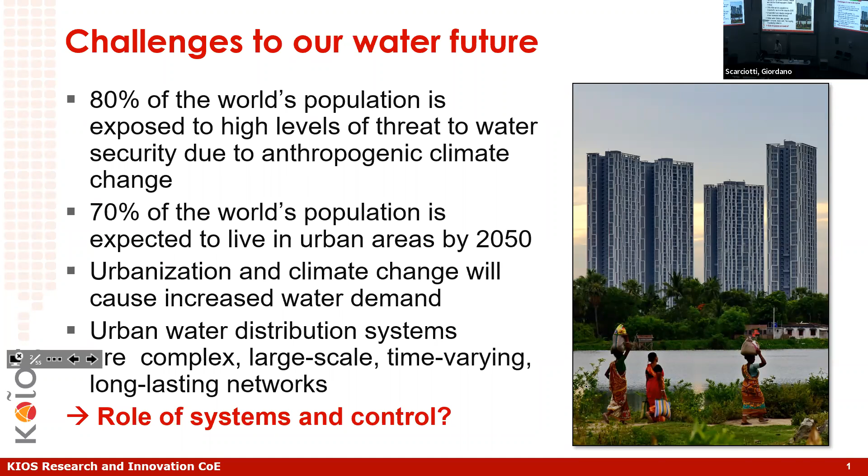Now, what can we do as systems and controls people? Where can we contribute? Of course, we cannot solve the climate change problem, but we can contribute in some key challenges of water distribution systems. I'm listing here four of these, which I think are very important, and I think we can contribute significantly in these areas.

One is that 25% of the water actually being produced in Europe is lost because of leakages, theft, and things like that. So this is something we can do better, and I'll talk more about it.

The other thing is about the quality of water. There are new directives coming out, new studies that indicate the quality of water is not at the required level, and we need to do more about it. Again, this is an area where systems and controls people can contribute.

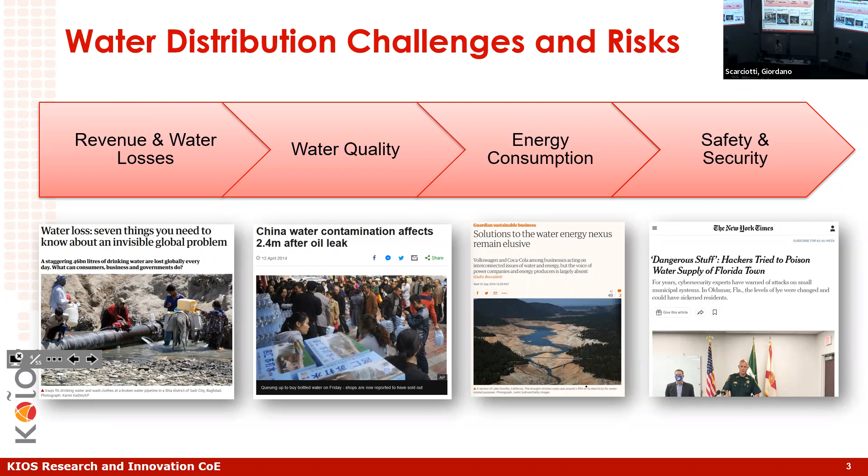And finally, with the new sensors and new instrumentation going on, the safety and security of water systems is becoming very important. So let's go through these four areas and talk a little bit about the challenges.

This shows the issue with water loss. 25% of the water in Europe is lost. In some cities worldwide, this is a lot larger. I'm showing some of the cities with the largest percentage of non-revenue water. So what is the cause of this? There's aging infrastructure, pipe breaks, background leakages, tank overflows, water theft, and metering errors.

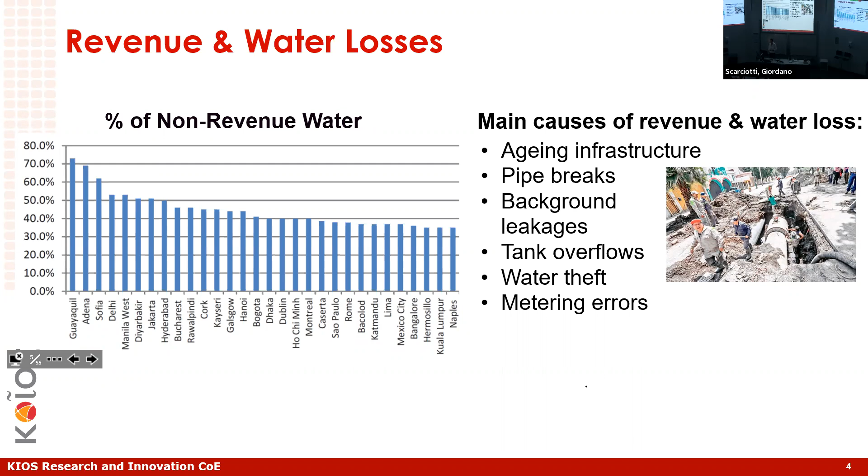So overall, just to get an image, drinking water losses every day are equivalent to 46,000 Olympic pools. This is a lot of water lost every day, and this is water that has already been cleaned and is lost.

So you may think, what can we do? If a pipe breaks, the water is lost. However, a lot of the losses are not like that, because the big losses are easy to detect and take care of quickly. A lot of the ones that accumulate to be very big are small losses that are never detected, so a small amount of water is lost for a very long time, and that's a big part of the problem.

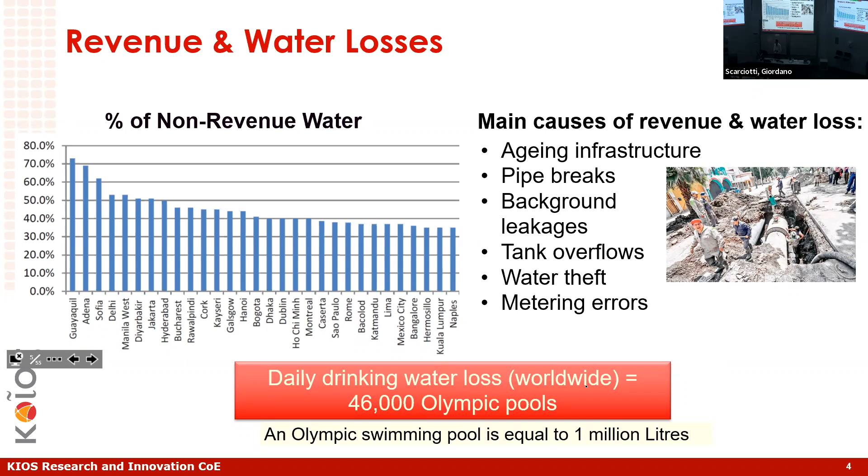When it comes to water quality, the raw water is usually dirty, is cleaned, disinfected, and then sent to consumers. The way water is disinfected is usually with chlorination. This is not always the case, some countries use other techniques, but most countries use chlorination.

Now, with chlorination, there's the issue of how much chlorine do you put. If you put enough chlorine to kill all the bacteria, you may get problems with taste, with smell, with complaints. But this is not the biggest problem. The biggest problem is that some studies show these chlorination byproducts are actually carcinogenic. So you want to put enough chlorine to kill the pathogens in the water.

And of course, the way that the disinfectant decays over time, at the same time, you don't want to put too much.

So there's definitely a control problem to be solved there. In addition to that, you have contamination events due to managing accidental or other contamination events, as well as malicious attacks that might contaminate the water.

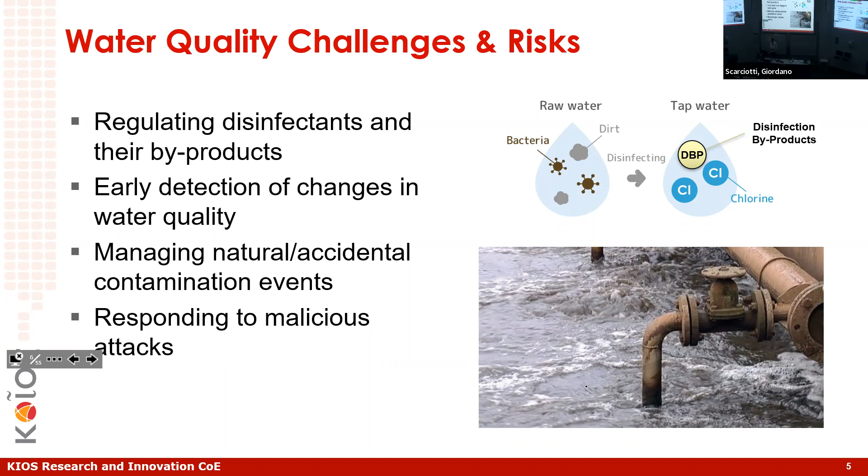Water quality is another key issue, and one example that indicates an accidental contamination crisis happened in Nokia, a city in Finland, where there was a 2-day delay to detect a contamination that caused 10,000 people to be affected and 3 months of water ban. If there was some algorithm that could detect this immediately, in 5 minutes or 1 hour, that would have solved these problems.

The other issue is with regards to energy consumption. As I mentioned, 4% of EU electricity is used by the water industry, this is for moving water, for pumping. This is also in the US, and of course this can result in significant greenhouse gas emissions. Just for moving water in the UK, and the UK doesn't have a lot of mountains, still 4 million tons of CO2 equivalent are used just for moving water, and in the US that's actually 10 times more. So there is potential for significant savings if we can do something about that.

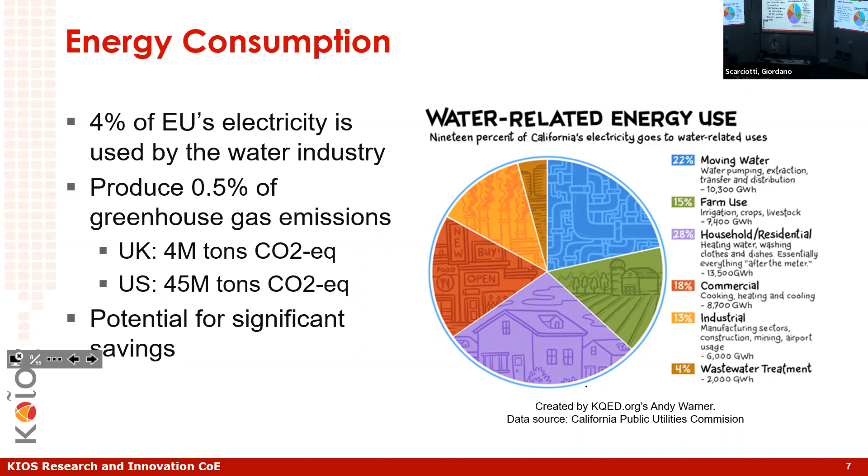And finally, safety and security. This is something that water utilities didn't have to worry about before. Nobody cared about it because everything was manual. Now, with more automation, there is more potential for malicious attack.

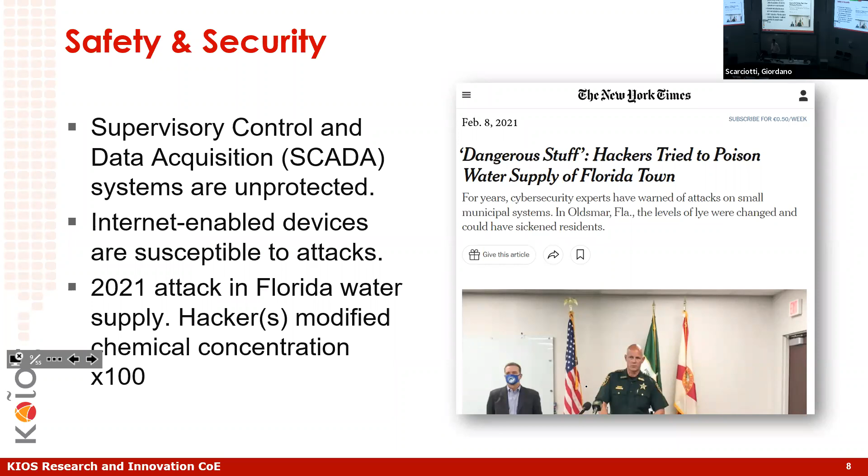And this was illustrated last year when there was an attack by a hacker in Florida, which modified the chemical concentration of a certain chemical by 100 times. Luckily, nothing happened because one of the operators noticed something, but if it wasn't noticed manually, it would have created a significant problem.

So the trend nowadays is towards having more instrumentation. I personally started working in water systems in 1995, more than 25 years ago. At that time, I had a master's student who wanted to work on an environmental issue, and we found a group in the environmental engineering department we could contribute to. But at that time there was not much sensing going on, everything was open loop. So most of the work we did at that time was just in modeling and trying to understand how systems people can contribute.

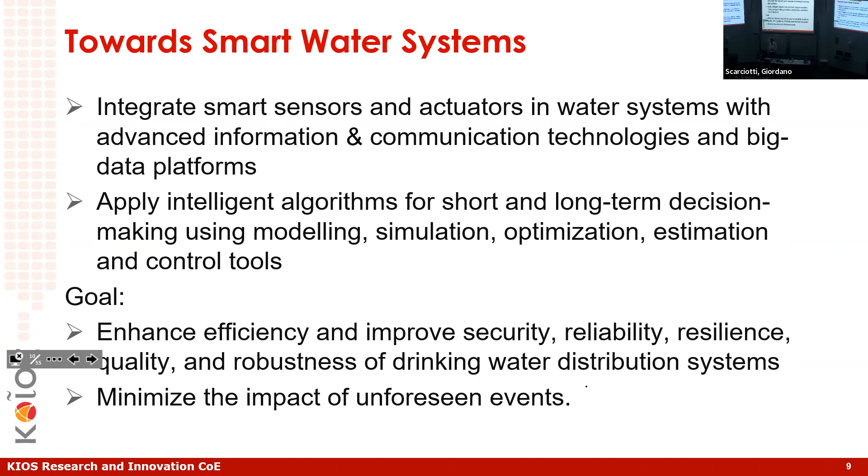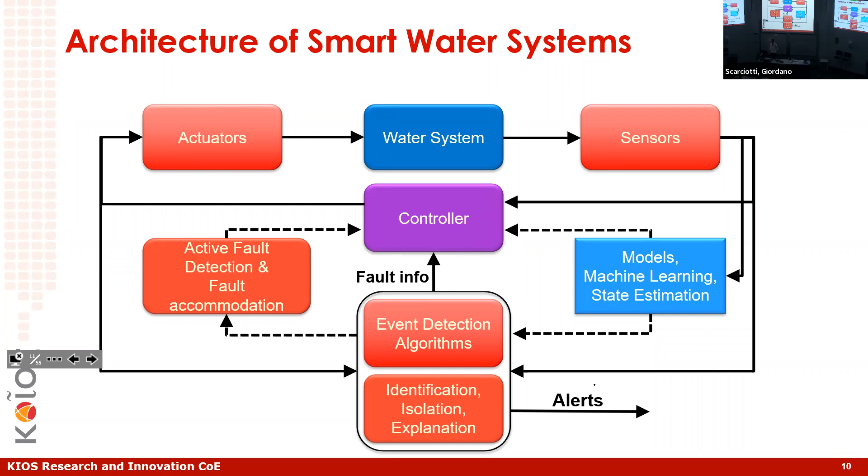So when we talk about a water system, what are we talking about? There are two types of dynamics that are very important: the hydraulic dynamics and the water quality dynamics. There are others that can be considered, but most of the work out there is in these two areas. The hydraulic states estimate water flows and pressures, while the water quality dynamics usually involve some chemical concentration. Usually civil engineers deal mostly with hydraulic dynamics, and environmental engineers and some chemical engineers deal mostly with water quality dynamics.

Usually computer engineers and electrical engineers don't have a key role, and this is where we come in nowadays with new technologies being developed to do things like real-time control and optimization. If we could estimate the states, then we can use techniques to detect pipe breaks, equipment failure, water contamination, cyber attacks, and so on. Unfortunately, real-time estimation in the current setting is not something used in practice, and let me explain why, what the current practice is, and where things are going and where we could contribute.

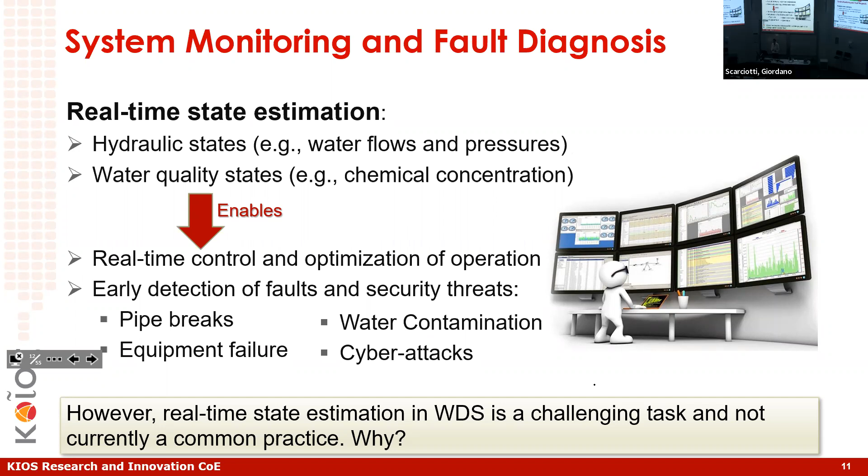So in terms of hydraulics, what we have is similar to energy and power systems: we have a transmission network and a distribution network. The transmission network is usually the big pipes, and the distribution network is in the cities.

Usually, water comes from reservoirs or other sources, is cleaned and pumped to where it wants to go. The hydraulic states are described by pressures at nodes, tank levels, flows in the links, and so on.

An important uncertain thing that creates a lot of the research motivation for some of the things coming later is that water demands are actually an uncontrolled input. We have water demands that we don't know. We have some aggregate estimates, but we cannot use that to estimate what are the flows in the different links and so on.

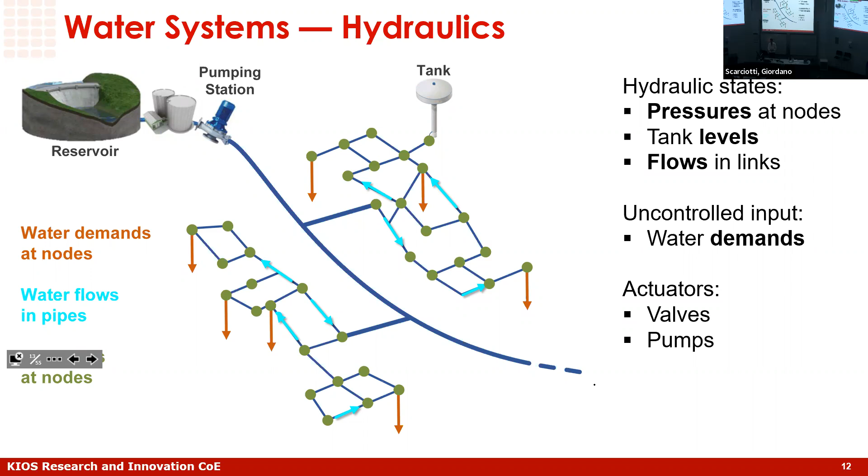Now, the actuators in terms of hydraulics are usually valves and pumps, but they are not advanced control algorithms, and a lot of them are actually open loop, manually operated. The distribution network is usually separated into what's called district metered areas, and in current practice, a lot of times all they have is some pressure and flow meter entering a district, a DMA. That's what it's called, and that's all there is.

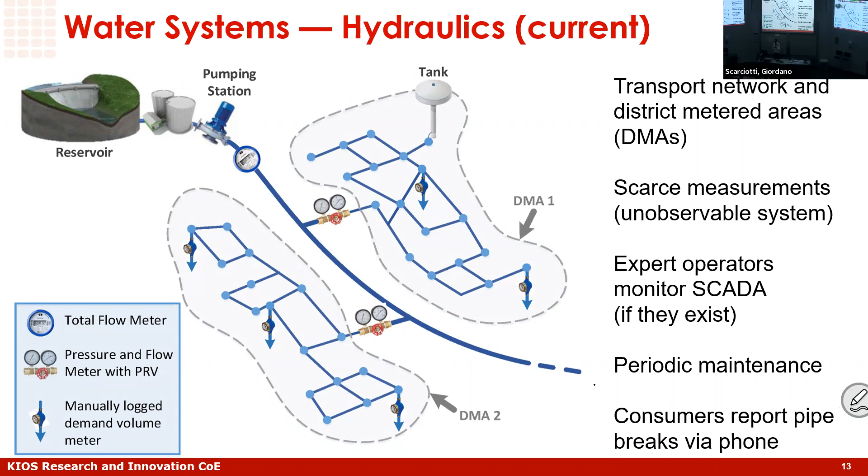You can think that it's very hard to do control with just one sensor in a network that has so many nodes. Now what is envisioned, and where the technology is heading, is to have remote sensing, a lot more real-time state estimation using measurements, remote actuation for real-time pressure and flow control, and that's why people from our community can contribute in these areas.

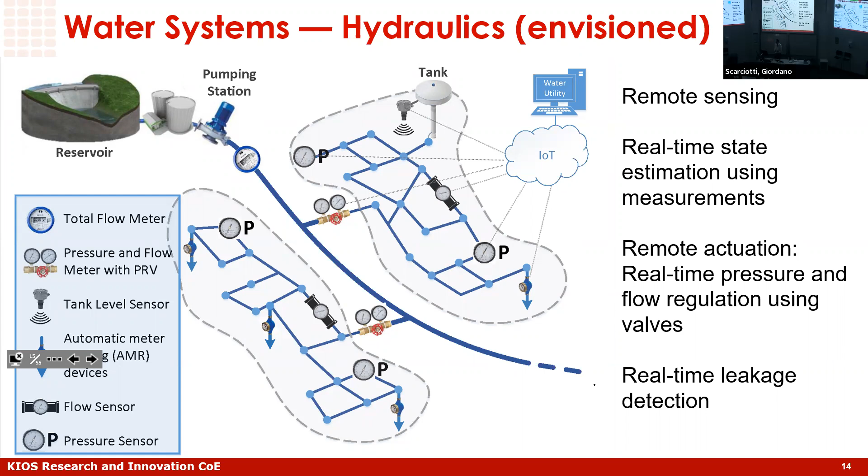In water quality, it's actually even worse because there's hardly any sensors. The water disinfectant, usually chlorine, is injected only at one location after the water is cleaned, in an open loop fashion. They just have a schedule, and then somebody goes to different parts of the network, maybe once a day or once every 3 days, gets a sample of water, takes it to the lab. It usually takes 24 hours to analyze what is in the water.

This is all just to make sure - if a contamination were to happen, that would be a disaster because it wouldn't be caught early on. So what is envisioned here, and already there's a lot of sensing being developed, is multi-parameter sensors placed for quality monitoring and contaminant detection.

Disinfection booster stations for improved regulation - so instead of having one control input, to have several booster stations at different locations based on real feedback information in order to do that. So this is what is envisioned, but is not in practice yet for many reasons.

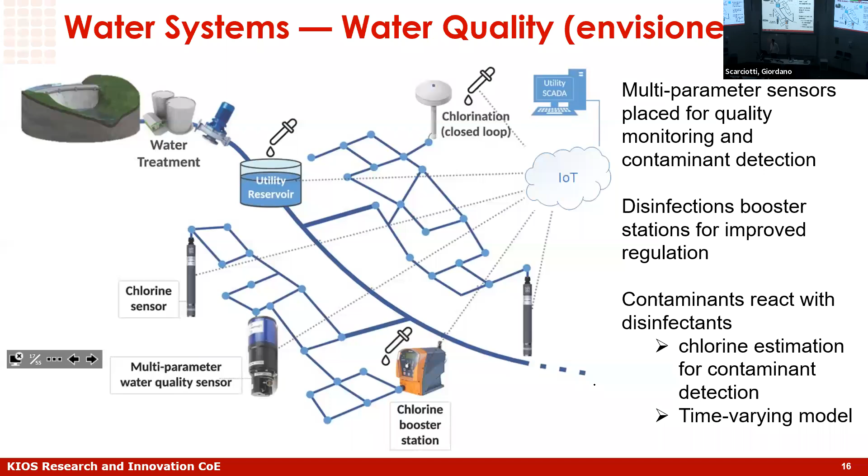But this is actually starting to happen. So in summary, if we were to look at this from a controls viewpoint, what we have is two types of dynamics: the hydraulic dynamics and the water quality dynamics. The hydraulic dynamics, because of the flows, affect the water quality dynamics.

The disinfectant chlorination - if the water is not moving, there's a decay in the disinfectant over time, so it's not as effective. If the water is moving fast, the disinfectant moves with the water. So the hydraulic dynamics affect the water quality dynamics, but not vice versa. This is the general setting.

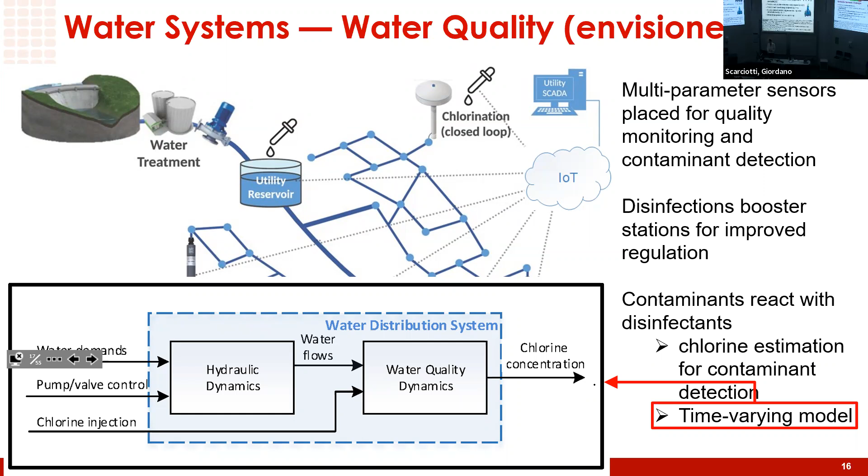In the last few years, there's been work in these areas. I just wanted to mention some of the things that have been done, especially from other people in this area, and also from our community. In hydraulics, there's been work on sensor placement, demand estimation, state estimation, leakage diagnosis, demand management.

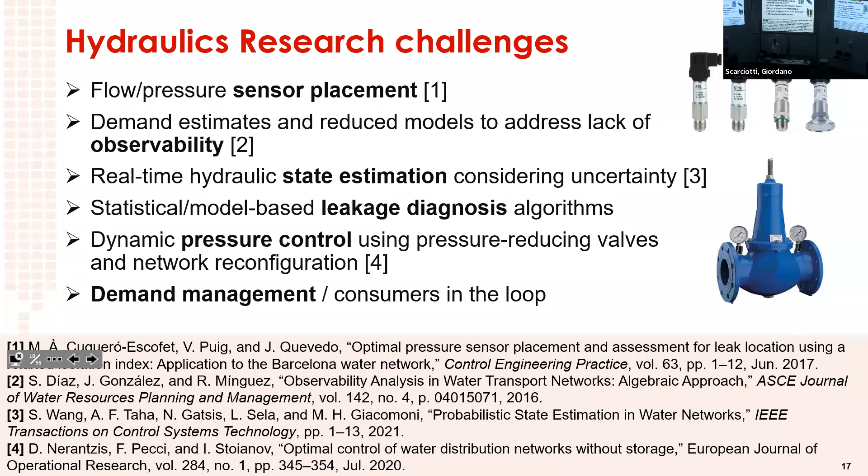In the area of water quality, there's again the question of where do you place these sensors. This is an important area because you may have 1,000 or 10,000 nodes, and you may have like 5 or 10 sensors to install. It's not just the cost of the sensors. Unlike other applications where 90% of something is the cost of buying the sensor, in water systems, even when you buy the sensor, installing it usually requires significant cost, and maintaining it over time also requires significant cost. So this is an important thing.

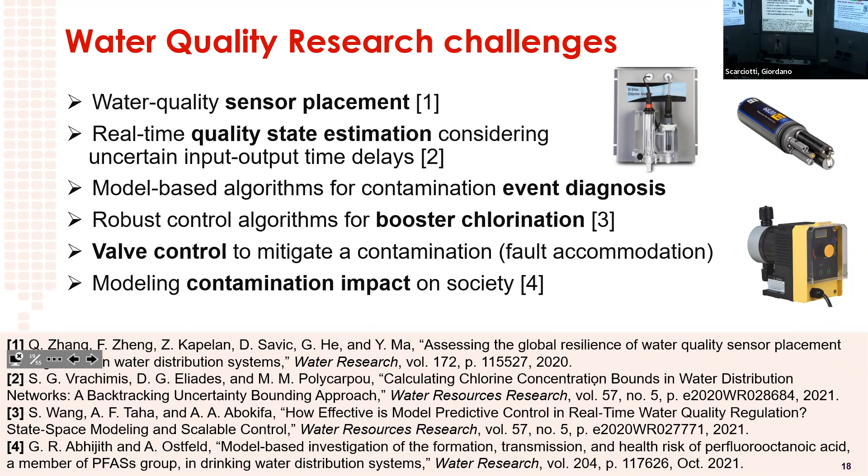Some other areas people have worked on are booster chlorination, valve control to mitigate contamination, which can be thought of as a kind of fault accommodation problem, and also modeling of contamination impact on society. So these are some of the areas that people have worked in. This water-energy nexus is something that I know in the EU is becoming an important research area.

One of the reasons, as I said there are several, is that a big percentage of the electricity, of the energy in general, is used for water movement. So there's an incentive to optimize water pump control under uncertainty, to optimize water pump selection for load shedding to reduce the risk of power system instability and water shortage, and also to detect anomalies in pump energy consumption in real time.

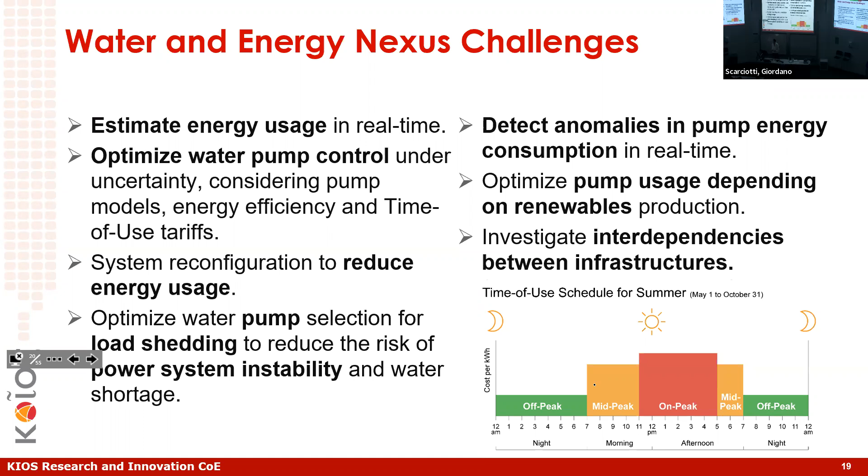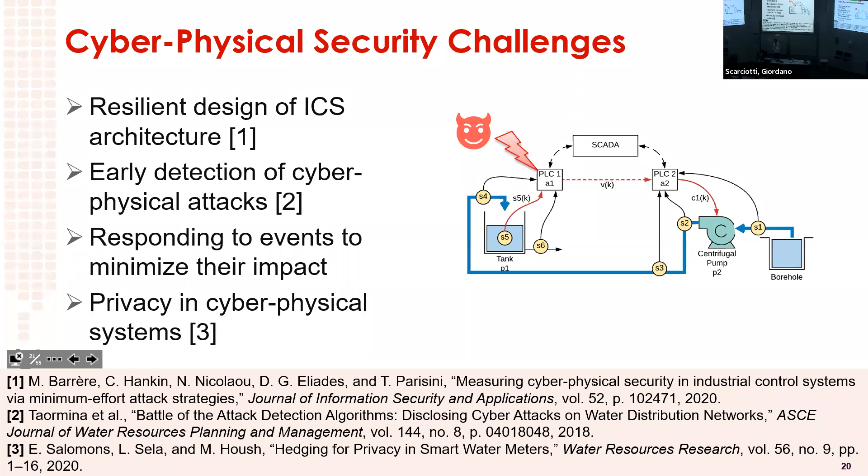This is another area that people have worked on, and also finally in the area of cyber physical security, how to detect cyber physical attacks in the case of water systems as quickly as possible.

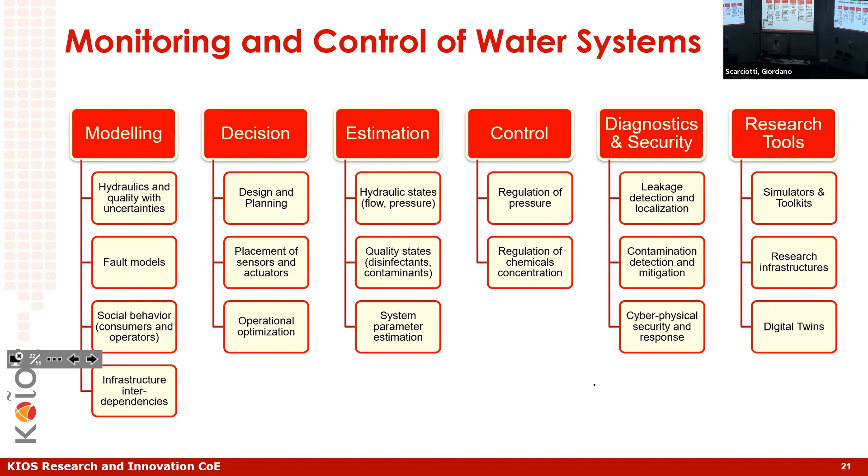So in the rest of my presentation, I'm going to talk about different aspects related to systems and controls, with some results. I'm not going to be able to cover a lot of things, but you'll get an idea of some of the things going on and where the systems and controls community can contribute. There's modeling, decision, estimation, control, diagnosis, and developing research tools. I'll talk a little bit about each one of these.

When we talk about the modeling of hydraulics, these are typically described by conservation of energy and conservation of mass at nodes. So these are nonlinear, but not highly complicated. At the same time, what makes it complicated is that the network is actually large scale. You may have 10,000 nodes and many more links, so this is what makes it more challenging.

And the fact that it's a system where there's not enough sensors, so all the techniques that we learn in systems and controls for developing state estimation and so on, this is not an observable system. So you cannot do that. This describes the flow and the head, which is basically the pressure, as well as the dynamic states.

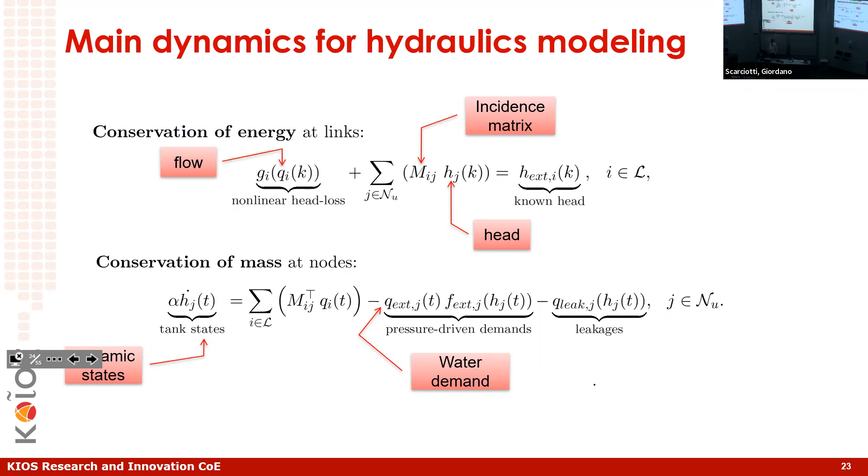So in terms of sensor placement, there's sensor placement for hydraulics. Where do you put flow sensors and pressure sensors in order to make the sensors most sensitive to leakages and to minimize estimation uncertainty?

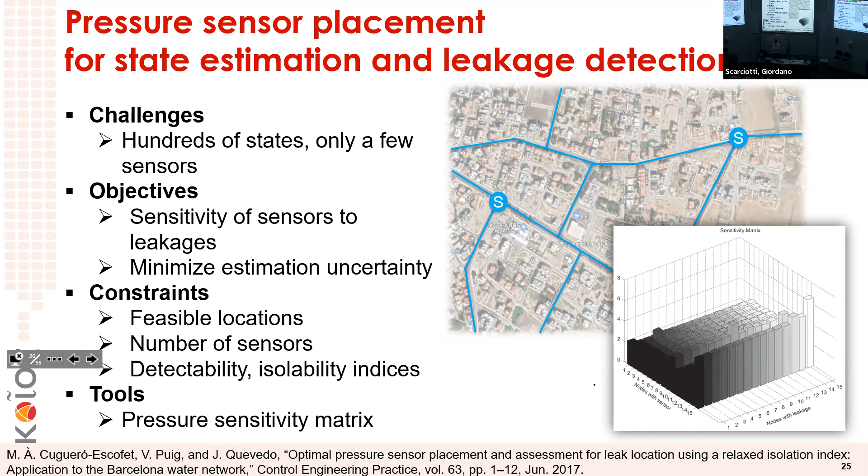And there's also placing quality sensors for monitoring. This is typically a multi-objective problem where you want to minimize the contamination impact. How do you minimize the contamination impact? You can think of the contamination impact as the amount of water that gets contaminated, or the number of people that get impacted. Both have been used.

You can think of it both ways, but also to minimize the detection delay. So if you have a network of 10,000 nodes and you have 5 sensors, you can develop methods, and we have also developed methods. I'm not going to go through the details of the methodologies in the interest of time, but I'm giving a lot of the references.

But you can actually move, just by moving the location of the sensors slightly, you can get much better results. And this is usually the case. This is not something even the experts - the experts, in my experience, have a little bit of a good intuition when it comes to hydraulics.

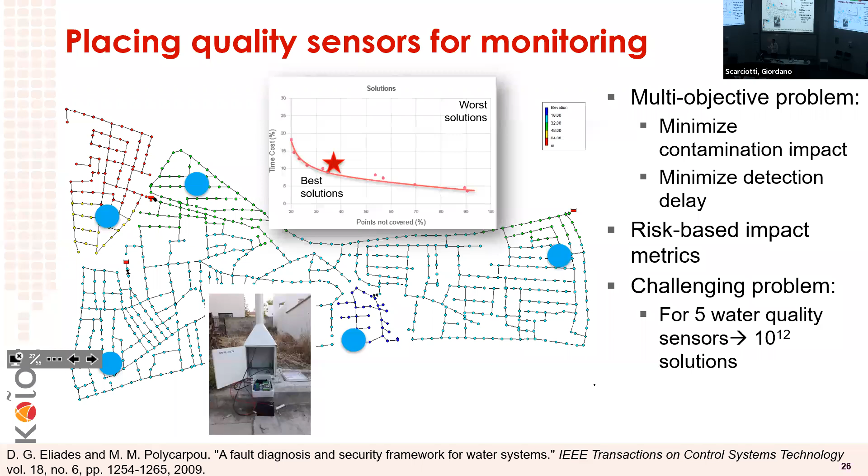In the case of water quality, they don't have a lot of intuition at all, because it's hard to see how, if there's a contamination, how it's going to propagate, and if you have a limited number of sensors, where you want to place them.

Now, when it comes to state estimation, one of the most popular simulation packages for modeling water distribution systems is called EPANET. It's mostly used offline, and if you input the demands and the controls, you can find the flows and pressures based on that information. Of course, in practice, you don't know the demands, so that creates a lot of uncertainty.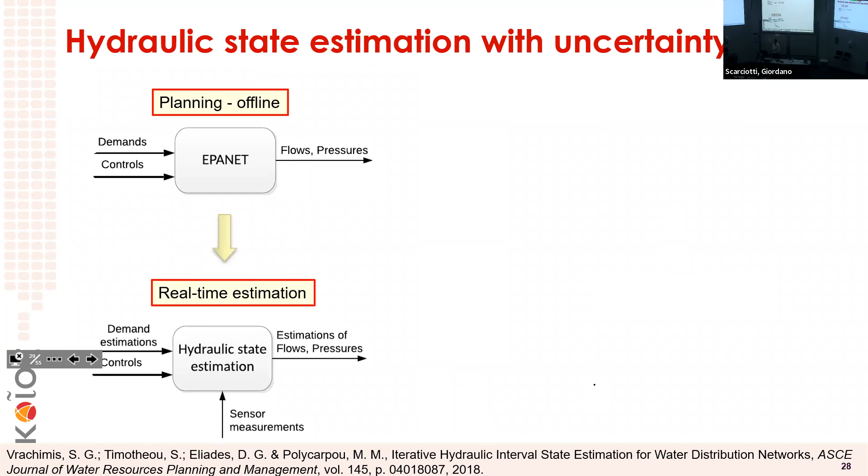So a big part of hydraulic state estimation is to work with the uncertainty, and a lot of the time you're interested not only in finding the different states that you cannot measure, but also in finding uncertainty bounds, because those uncertainty bounds are used to detect leakages or water contaminations and so on. So a big part of this is because the water demands are changing and are uncertain, and it's not only the water demands - there are also other components in the model that are uncertain.

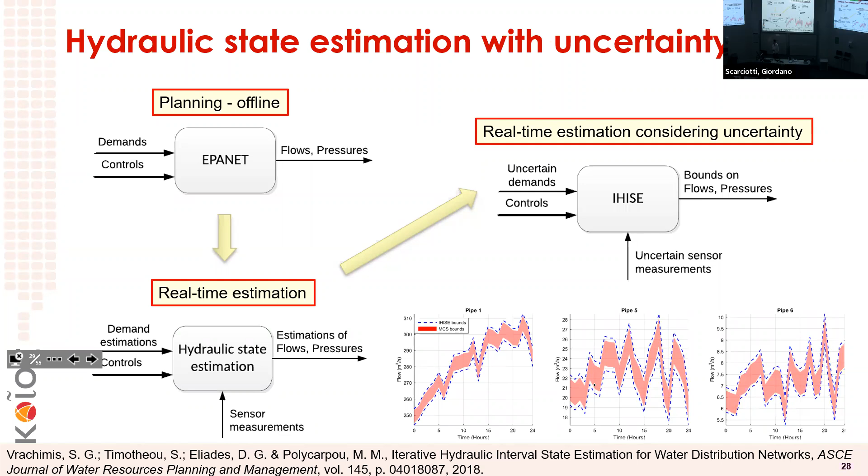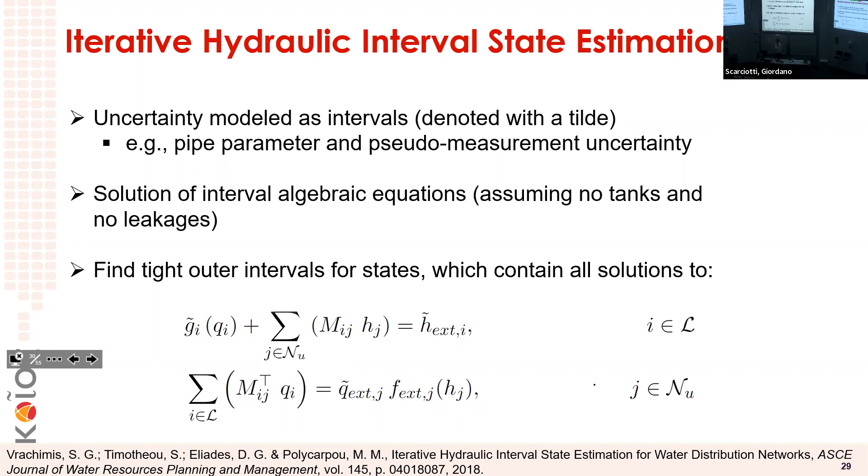One of the key issues is how to deal with interval state estimation rather than point state estimation. In this area, we developed an iterative technique that calculates this interval state estimation, which we use, as well as other people, both for fault diagnosis and for contamination detection. So this describes the iterative hydraulic interval state estimation methodology.

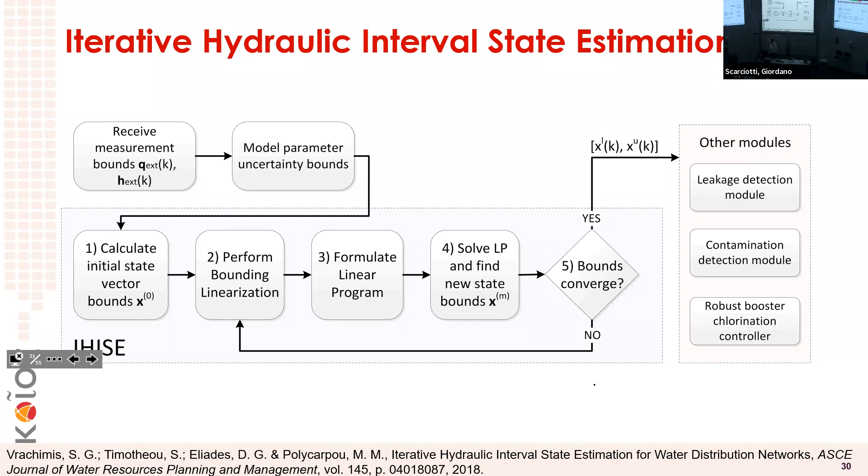It's based on computing the bounds as you move on, and the fact that it's iterative allows you to solve the problem in reasonable time. This is one of the, I'm not going to go through the details, but this is the main idea.

Here you can see a comparison with the calculated state bounds for different nodes. So if you take every different node in the network, and given that you have, let's say, 10 sensors, some models and some uncertainty bounds, you want to be able to find these lower and upper bounds over time for all the different nodes. To evaluate the method, you can compare with Monte Carlo simulations, which takes forever to do, but it shows that these are actually tight bounds, which is one of the results that is going on.

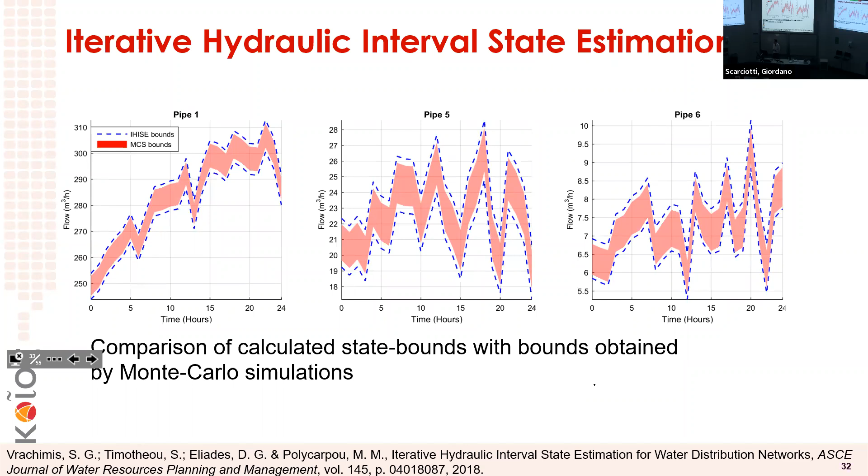This has also been improved with some colleagues from Brazil and Italy using constrained zonotopes for uncertain state estimation. The benefit of these constrained zonotopes is the fact that you can actually capture the dependency between the state variables, so you can make the bounds tighter, which really helps when it comes to leakage detection and providing higher leakage detection rates.

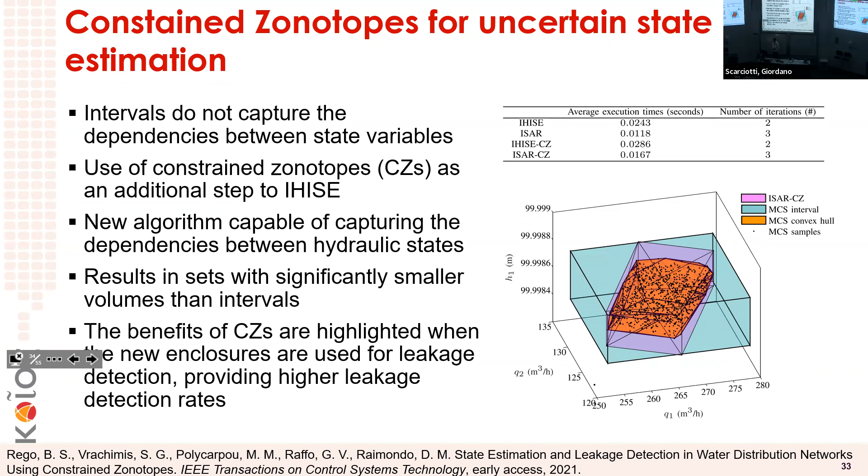Now, regarding estimating water quality systems, this is another area where we have done significant work in terms of developing algorithms. Given that you have some sensors, can you estimate the water quality in terms of chlorine concentration at different areas? This is an area that is becoming more important over time.

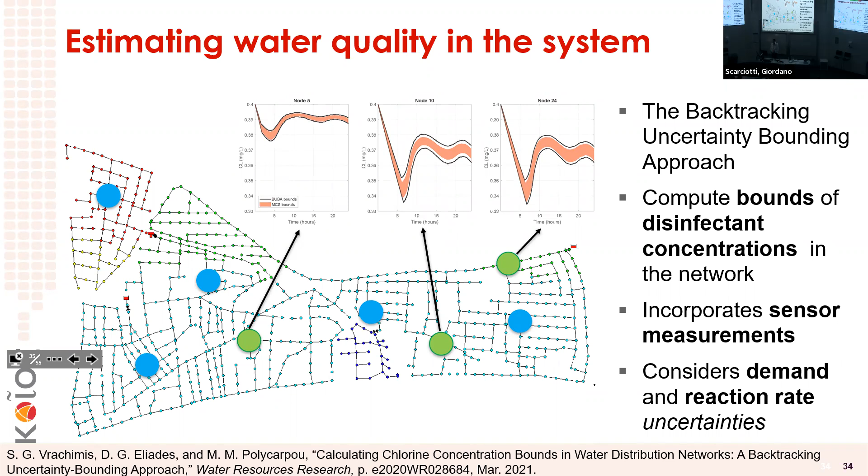The idea is, again, it's not just a matter of doing state estimation, but to actually find, given some bounds on the decay rate or the water demands, how can you estimate the water quality at different nodes in the network? I'm giving the reference here.

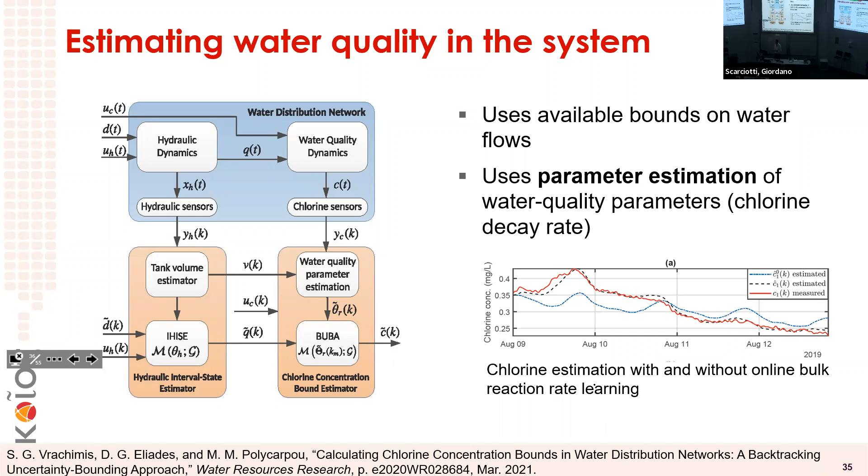One of the things we tried that worked very well in practice is to use parameter estimation for some of the water quality parameters, for example the chlorine decay rate, which showed that performance was significantly better using this online parameter estimation of the decay rate rather than not using it and taking the best estimate, especially when it's changing over time. So some of these adaptive techniques are working quite well.

Now there are two ways that you can do that: you can try to control the pump and valve, or you can try to inject chlorine. In practice, pump and valve control is used only for the hydraulics, because if you try to control the flows in order to affect the quality, that may affect the supply of water, so none of the water people want to deal with that. So in practice, what is being done is use chlorine injection.

Now the problem is, if you put chlorine at the beginning of the network, by the time the disinfectant gets to the periphery of the network it has decayed, so it's not high enough to keep the water clean with respect to pathogens. While on the other hand, the people close to where the disinfectant was injected will get high levels of chlorine, which is not good for them either. So in order to have a suitable spatial temporal distribution of the chlorine, you need to be able to put different boosters at different locations.

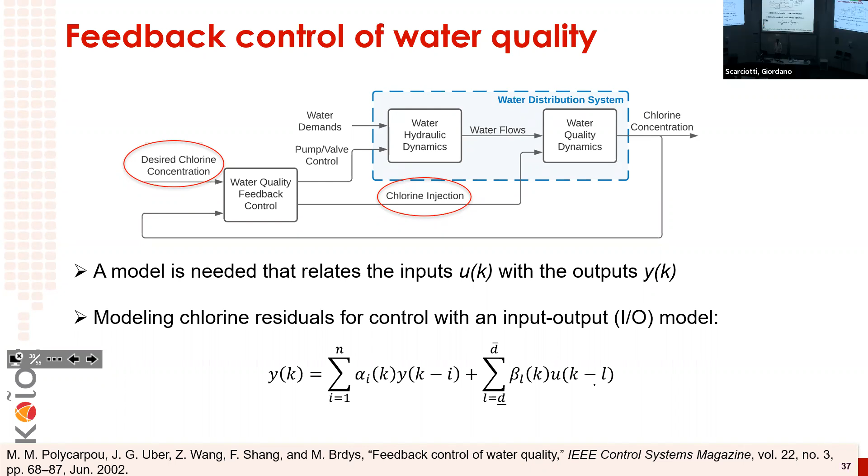So this is one of the areas that we are working on, as well as other people, which is a very difficult problem.

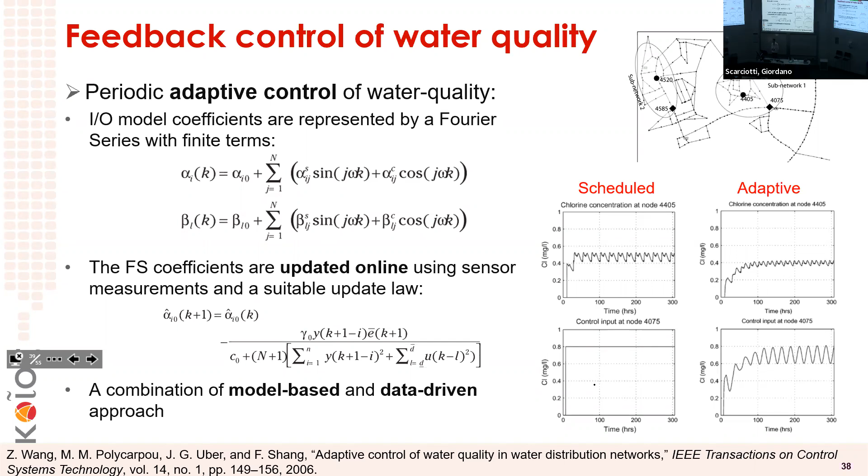One area where adaptive control has been used is taking advantage of the periodicity of water demands. We know that water demands go up in the morning when people use a lot of water, then go down, and go up again when people come home, and during the late night they go way down. So this is the usual periodicity. If you take that into consideration, you can use adaptive control to estimate how you want to inject chlorine to account for that.

In the area of diagnostics, state estimation is very important for detecting leakages. It's just one extra step: if you know where the bounds should be, then when values exceed those bounds, that's an indication of leakage detection.

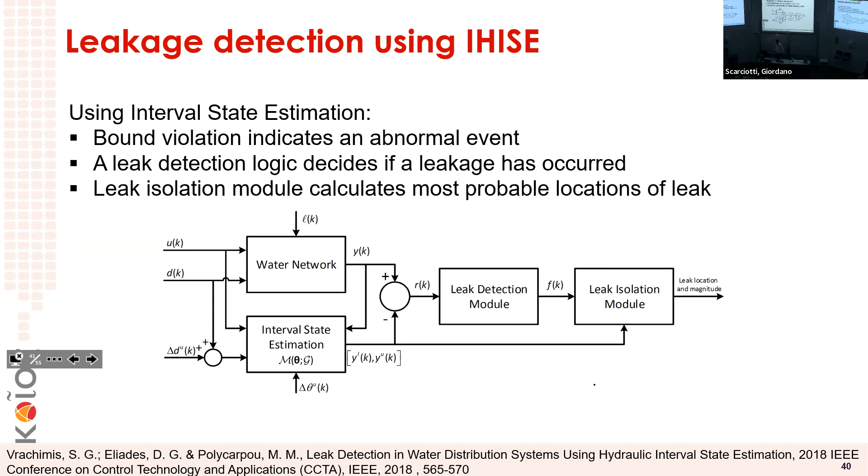The way this is done now in practice is that water utilities manually look late at night, around 3 or 4 in the morning, when they expect not many people would be using water, in order to detect big leakages. Someone looks at the late night data, and if it's more than what they think it should be, they flag it. However, with this method, you can only detect the big leakages, not the small ones.

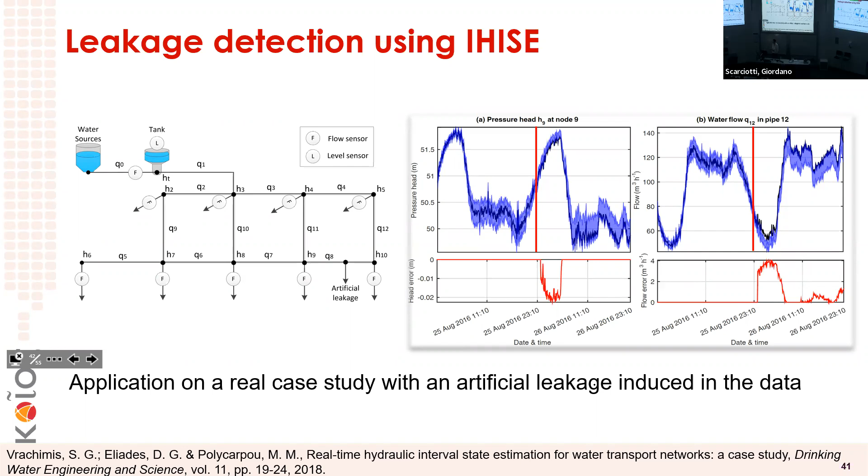So when we worked with them and tried some of these algorithms, they were really impressed that we could actually detect small leakages that were accumulating over time. This is one example of an application—a small network—but we were able to detect leakages that they couldn't detect otherwise.

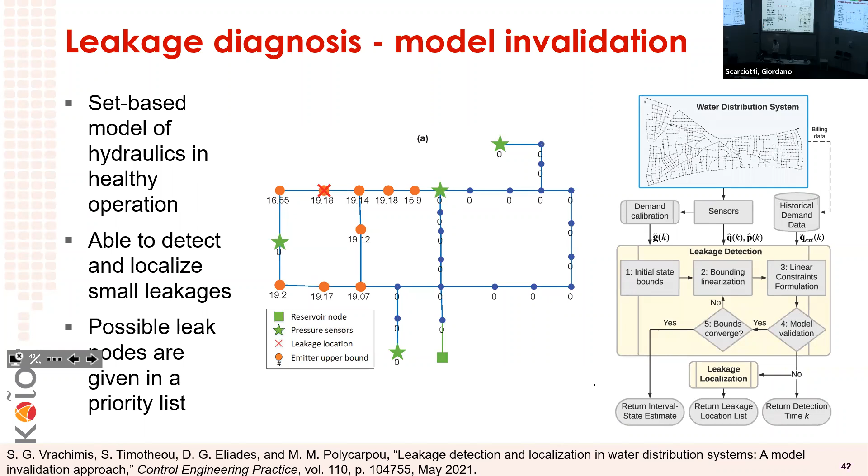This technique was actually extended more recently to not only detect the leakage, but also localize where it is. Of course, to do that you need smarter algorithms, especially if you don't have a lot of sensors, which you don't in practice. You want to use the model in a way that achieves that. This is one of the areas we worked on recently.

Another area is active contamination detection. If there's an indication that maybe there's contamination, someone calls and says, I think there might be contamination at this site. The usual way is to send someone over there, with some delay unless they think it's a big issue, to take a water sample to the lab. This usually takes at least 24 hours, so in the case of contamination, this is not a very effective way.

One of the things we tried is, let's say you have some sensors in the network that detect chlorine concentration or the amount of contaminant. The idea is: can you close some valves in order to direct the water towards the sensor as quickly as possible? This may seem counterintuitive because you're kind of distributing the possibly contaminated water away from where it starts.

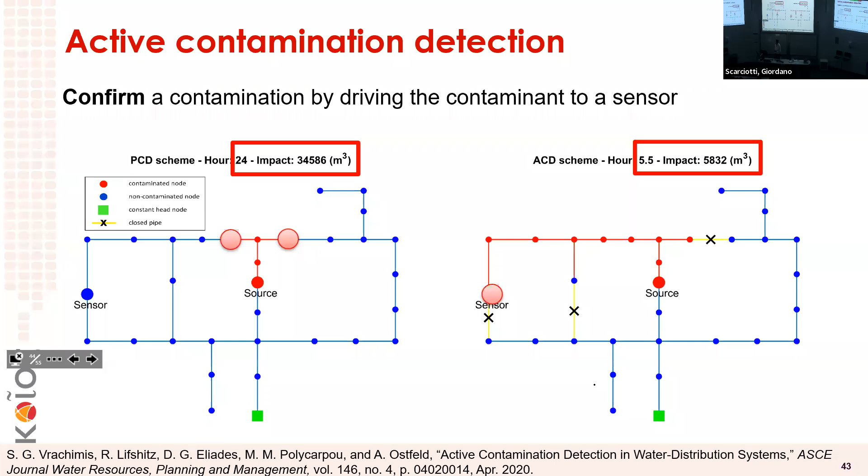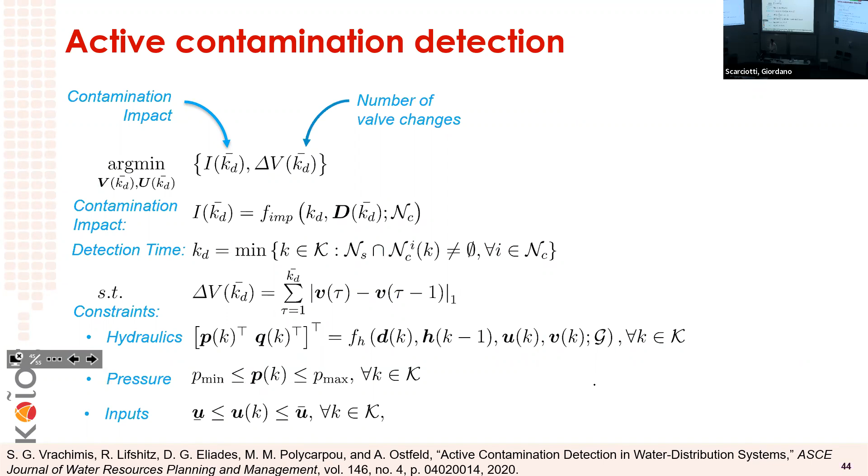So this is the optimization problem that was set up to achieve this. The two things we want to do are minimize the contamination impact and also minimize the number of valve changes and so on.

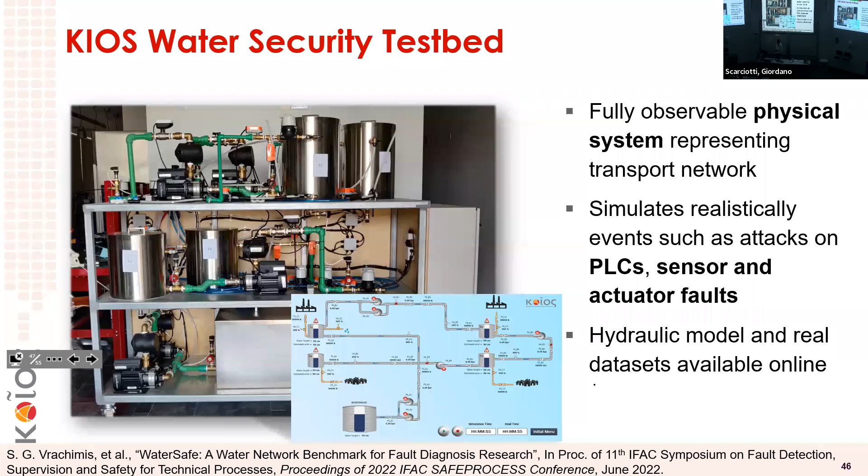So it's a very nice system that was developed, and we also got data sets which are available online for people to use and play with. Another thing that we developed is what is called the KIOS virtual city. This is based on a real city in Cyprus using open data. We integrated a realistic simulation platform of most of the city infrastructure.

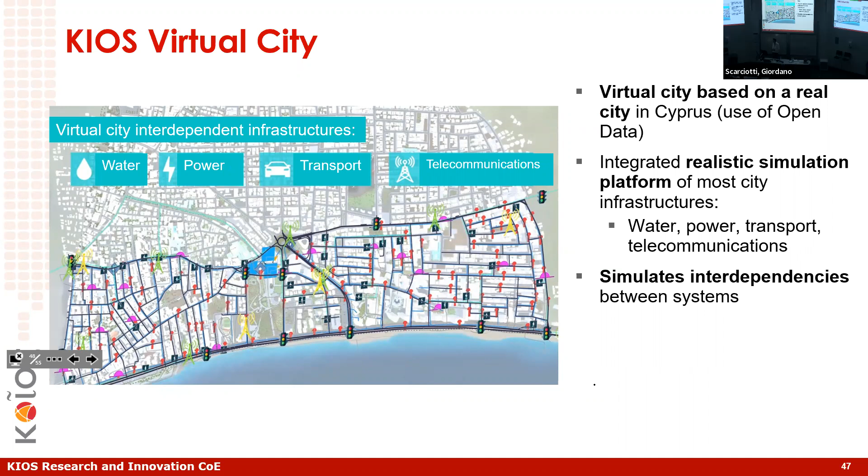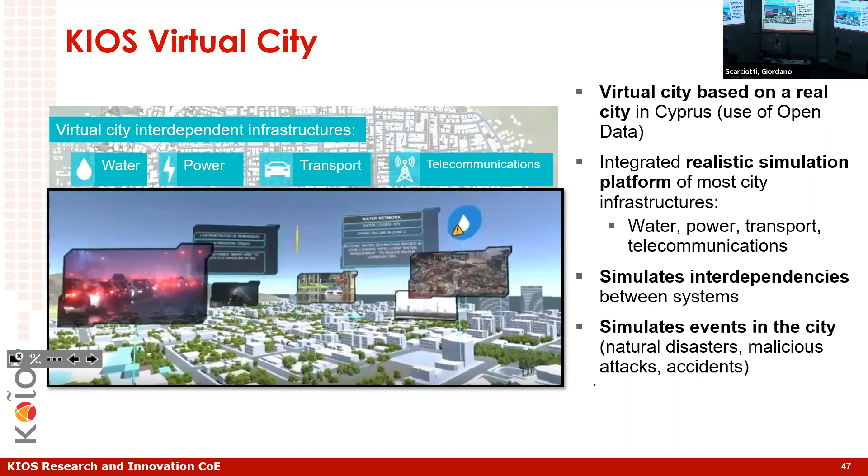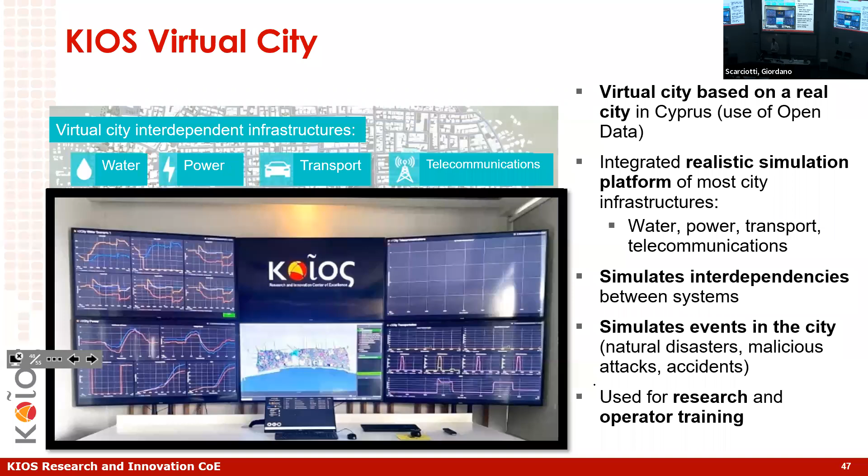So for security reasons, we changed some things, but everything is based on open data, and in addition to the water, we also have the power network, the transport network, as well as the telecommunication network. This can help simulate interdependencies between the systems and try different algorithms. Other researchers are welcome to utilize this as well. It can simulate events in the city, for example malicious attacks, accidents, or natural disasters. This is the KIOS virtual city, used for research and operator training, and it also helps to generate benchmarks and tools for the controls community.

One of the benchmarks we developed is a competition. We created a realistic 2-year simulated SCADA data set with leakages in order to have a competition with leakage detection and isolation methods. This competition went on and there was a winner.

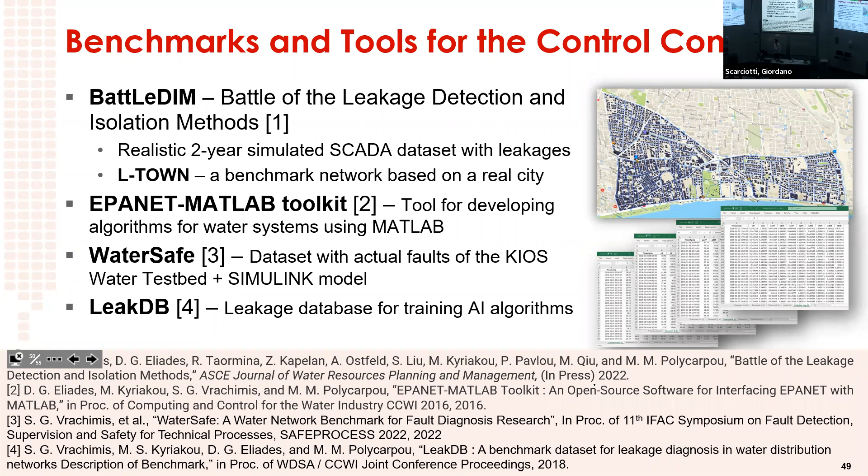In addition, we have a tool for developing algorithms for water systems using MATLAB. Most control engineers don't know how to use EPANET, which is what the water hydraulics people use, so we developed this toolkit to convert things to MATLAB. We also have some other databases, especially for use with machine learning algorithms.

Finally, I wanted to mention briefly the ERC Synergy grant that Thomas mentioned. This started last year, in the area of water systems. It brings together people from the water engineering community, an environmental economist to talk about policy making for water supply, and a computer scientist for developing machine learning algorithms. The main idea is to look at how, as the system is evolving, to optimize the design as well as the operation of this system.

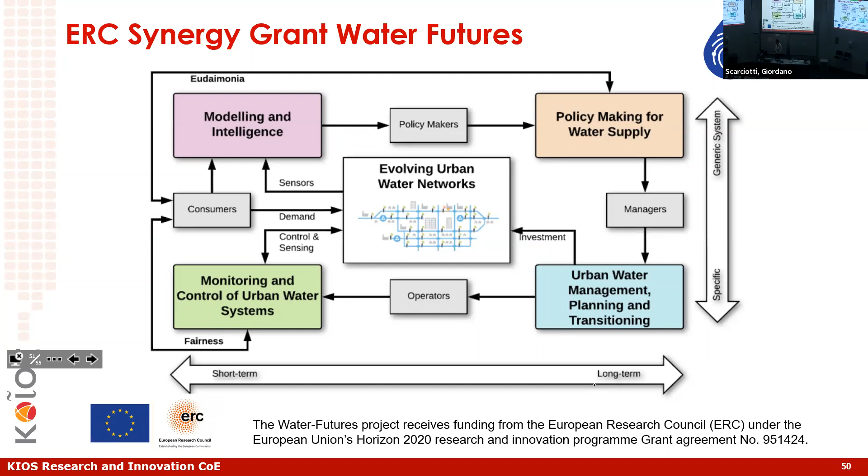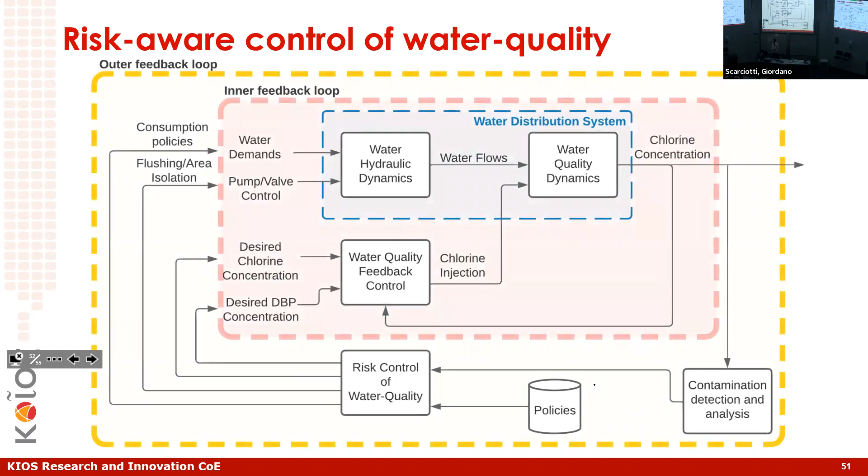In that light, we are working on this diagram you saw earlier. Think of it as the low-level control, and we're looking into the outer layer in order to see what should be the objectives for this system.

The other important thing is that the water distribution system is going through a digital transformation with new instrumentation, sensing, and actuation, and the Internet of Things is going to affect things quite a bit. Systems and control can play a key role in developing these intelligent algorithms and new tools for making water distribution systems more efficient, more resilient, more secure, and more aligned with the green economy.

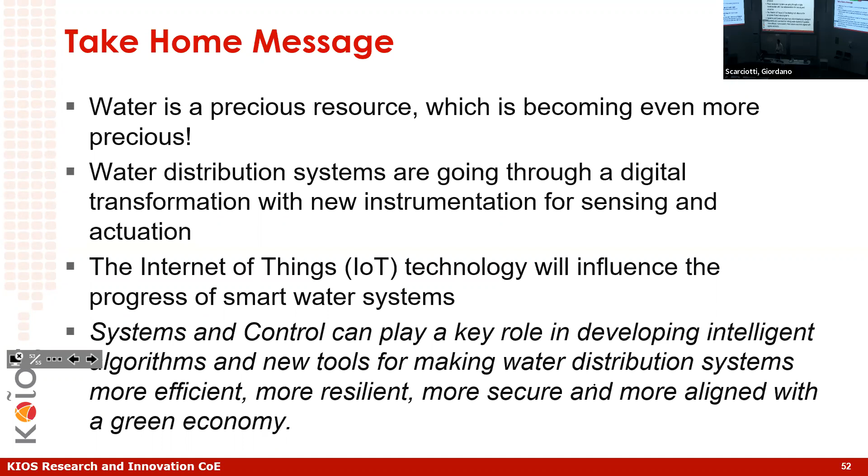I wanted to acknowledge the support of the ERC, and also we have a teaming project in collaboration with Imperial that is supporting this work. Finally, I should mention that we have a very long-term collaboration with the water utilities. The Cyprus Water Development Department is responsible for the transmission of water, and each city is responsible after that. We have a long-term collaboration with the Water Board of Limassol as well as other cities, which is very important in order to do this work, because they know how the system works. So that's all, thank you for your attention.